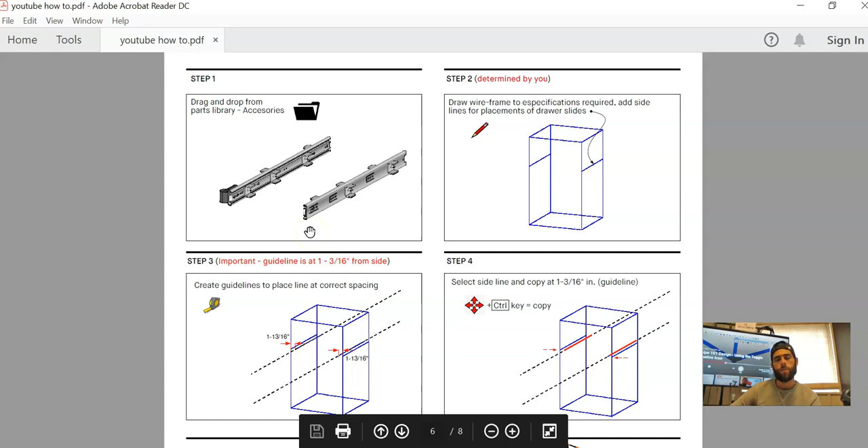Step one, we're just going to drag and drop the accessory. We'll find that in the parts library accessories file and look for the particular one that you're looking for. From there, we're going to draw the wireframe, and we're going to keep an eye out for 1 inch and 13/16. That is one of the most important dimensions for this particular type of drawing. And then we're going to make the interior wireframe, which is going to represent the actual pipe frame.

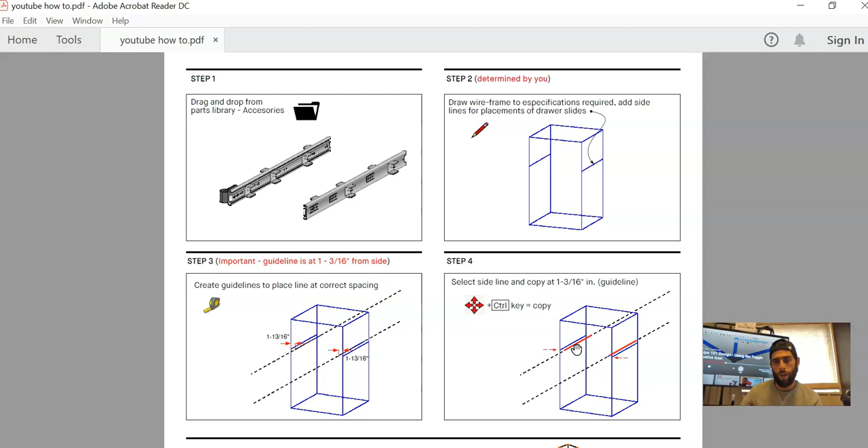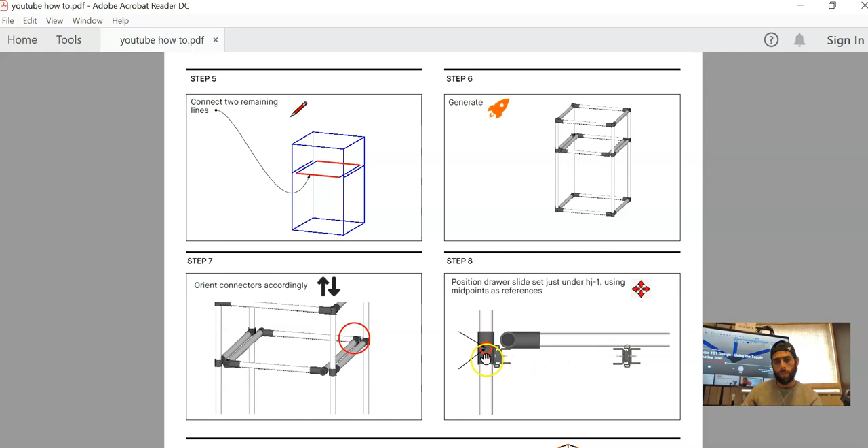Okay, step 5. From there we're going to finish closing it off. We're going to generate the structure. We're going to look for any changes that we may need to do to the connectors. And then from there, it's all about using reference points and the move icon to position the drawer next to the actual HJ1 where it's going to be sitting.

The reason for that is so that we can take a measurement to put it in the right placement on the opposite end. With the tape measure, we'll figure out what that dimension is. From there, we're going to select that, move it over, make sure it's in the right place, and then move it up to its final destination.

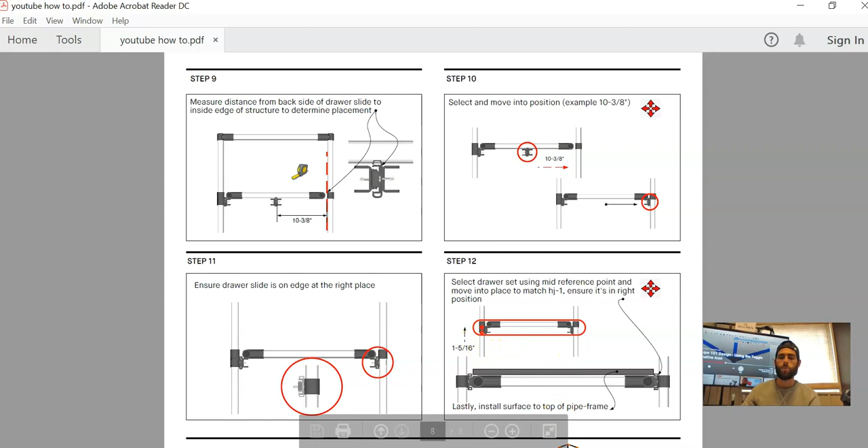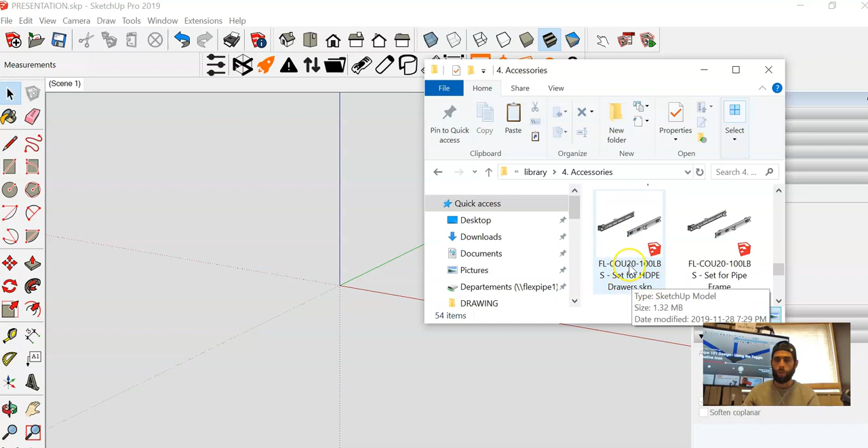All right, so let's jump into the drawing. First thing, what did we say? We need to open up that parts library and look for the accessories, and then look for the actual drawer slide set. Should be all the way at the bottom. And don't get it confused with the set for HDPE drawers. We want to look for the one that says set for pipe frame, okay?

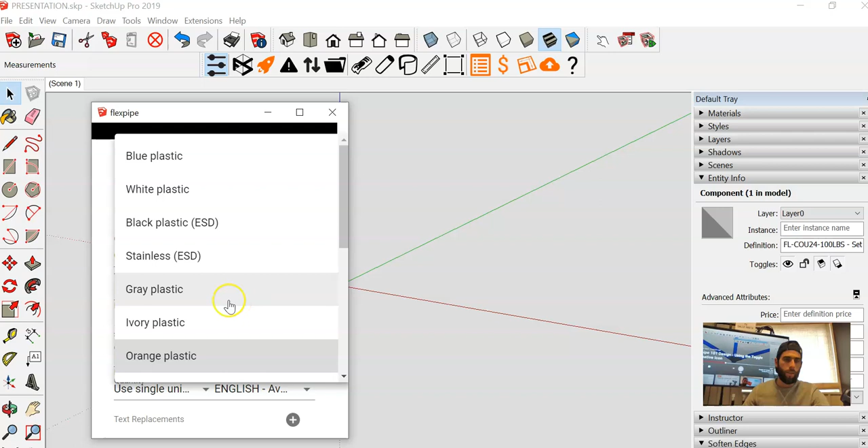And I'm looking for the 24-inch 100-pound weight cap. So this is the guy right here. We're going to drop him in there. And now we're going to draw our structure. We can choose black connectors, and then what do we want to do today? Maybe red. Let's go for red.

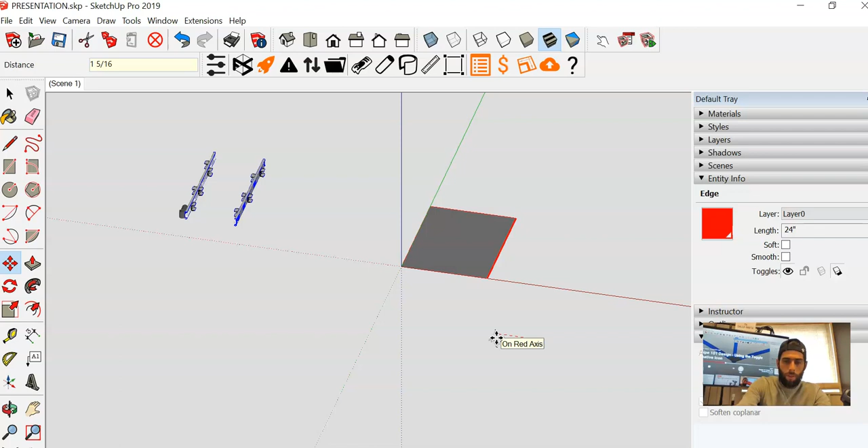All right. So with that, we're going to draw 24, 24. Okay. I'm going to reduce this 1 inch and 5/16 because I want it to be 24 exterior dimensions when it's all said and done. So that's why I want to move this 1 inch and 5/16 on both sides, so that it's actually 22 11/16 center to center. And then when it's generated, it's going to be 24 exterior dimensions.

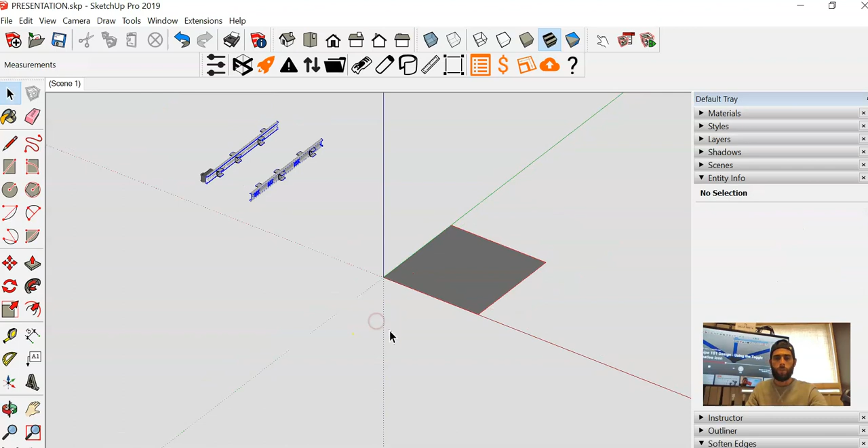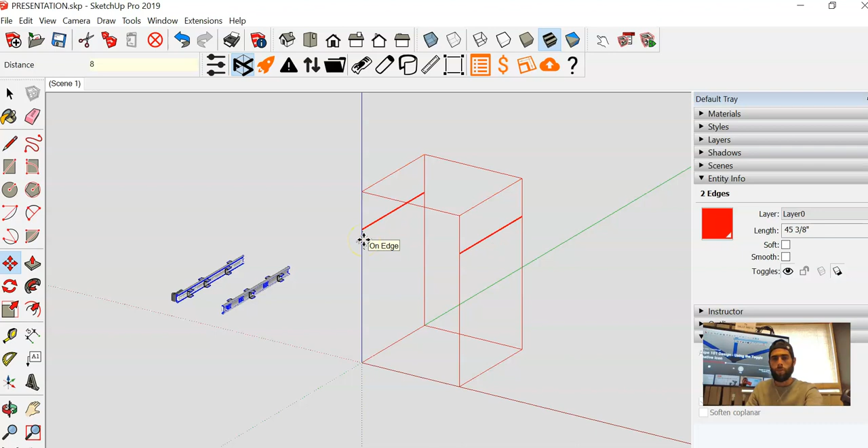Last thing, I'm just going to bring it up so we have enough height to do the operation here. Okay. Next thing is let's make a copy. We want to grab the sides, and we're going to bring them down to, let's say, 8 inches, and that is where the drawers are going to sit on the actual structure.

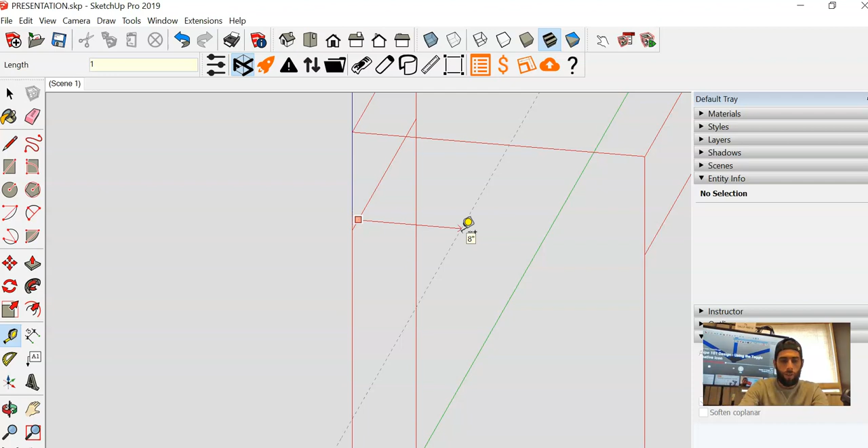We now need to draw the actual pipe frame for the drawer. So 1 inch and 13/16 is what we mentioned, so we want to create a guideline coming away from the first line, 1 inch and 13/16. And then I'm going to do the same thing on the opposite end as well, 1 inch and 13/16.

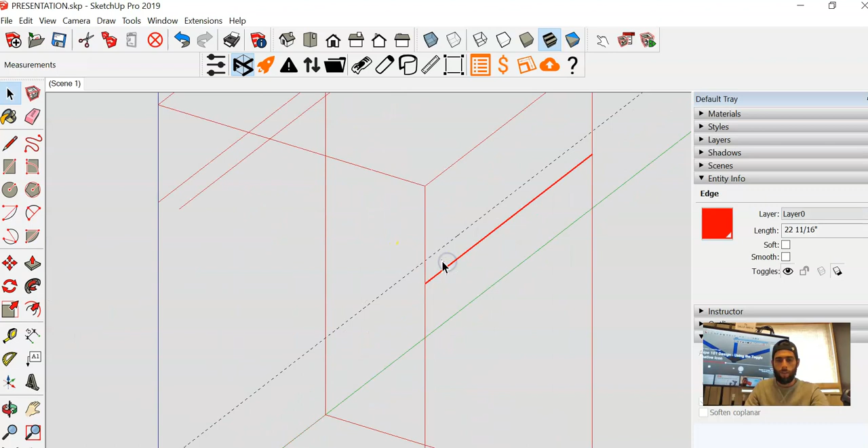So with my guidelines in place, I'm going to make a copy of this and bring him over so that it ends up on the line. And then I'm going to X that, and same thing over here, okay? So we can make a guideline, or you can make a copy and tell it to go 1 inch and 13/16. Whichever you're more comfortable with. The idea is to make sure that it does get to be at 1 inch and 13/16. So not too bad there.

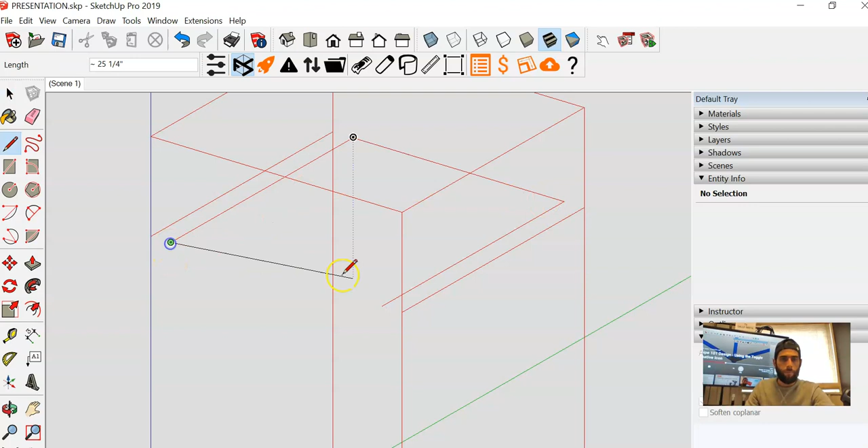Next thing we want to do is connect those remaining 2 lines there. Okay, there we go. So nothing to it, right? Other than that, we're just going to go ahead and generate this.

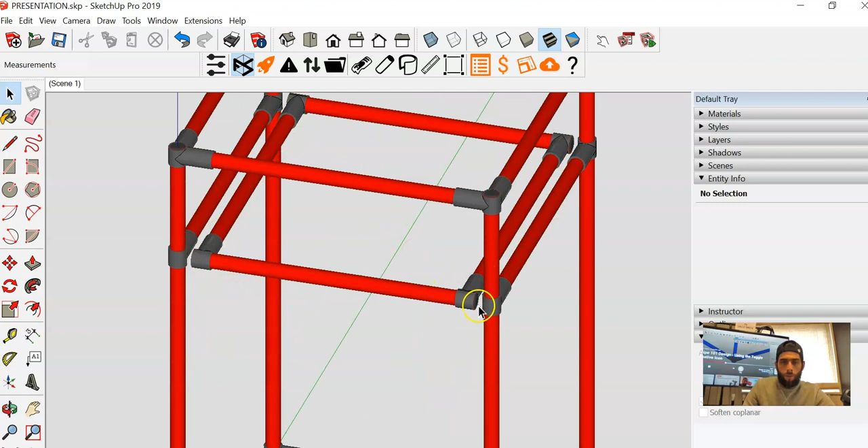And now we're going to go and find the toggle alternative, because what we want to do is just to see if we have to change anything, any orientation of the joints. So right now they are all lining up how I would like them to be. If for some reason this one ended up being in a different position, like so, then it's just a matter of, again, looking for the right positioning and lining it up so it matches the rest of your HJ1 connectors, okay?

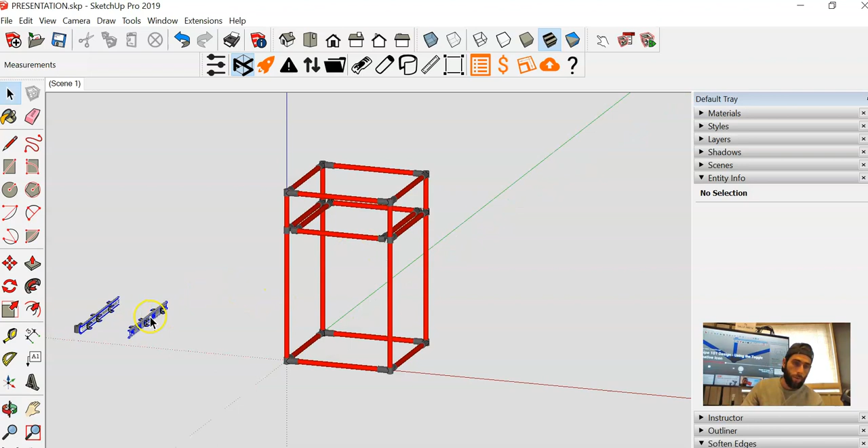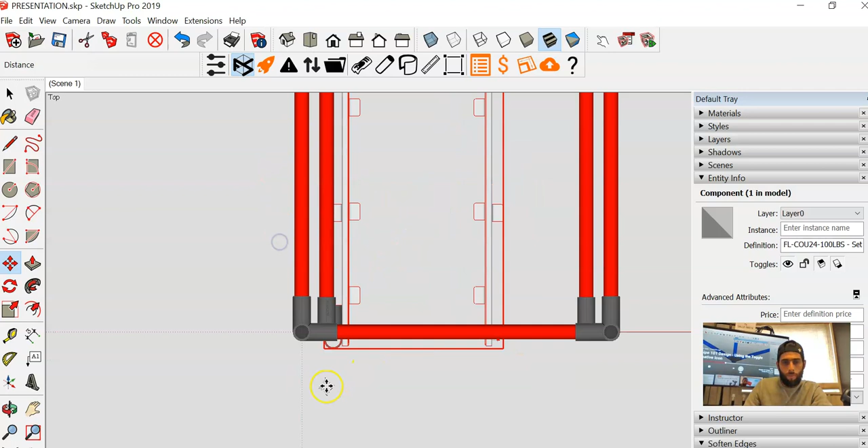So at this point, what do we need to do? We need to go ahead and now select our drawer slide set. And with my move icon, I'm going to go ahead and move this as close as I can to be able to find that reference point. So maybe I can look at it from the top to see if I'm actually, okay, yeah, you see? So now I need to go ahead and bring this guy forward so that I can get him close enough to where I'm going to be able to do what I want to do, which is connect the top midpoint with the bottom midpoint of this other one here.

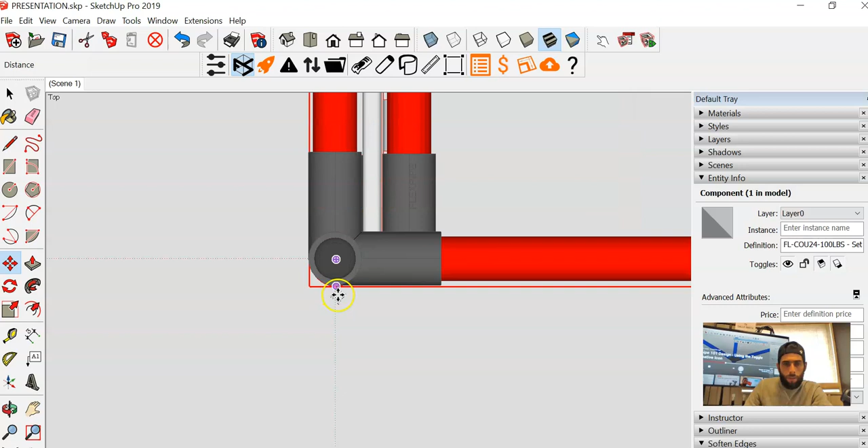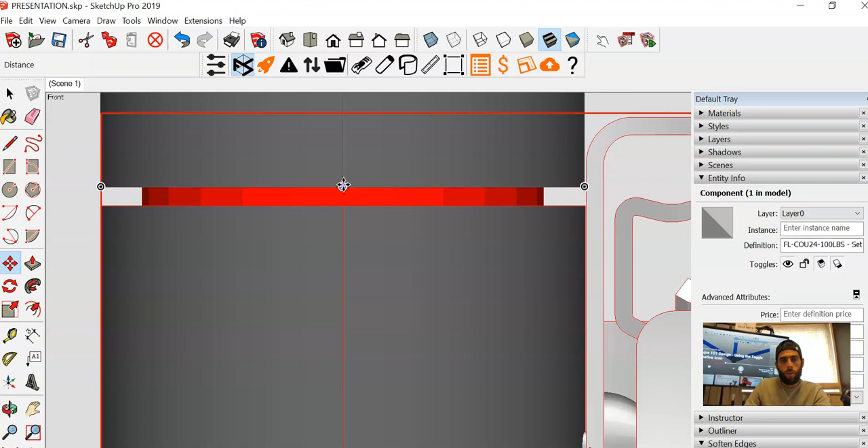So I can't seem to be able to do it. Maybe I need to go ahead and top view, and it's maybe just a little bit off. So I'm just going to bring them down, and I'm just working in straight lines so that it's a little bit easier for me to do so, okay? And I should be pretty good there. So maybe if I just hover over that one reference point where I want to go, and then I go back to the one I want to move, sometimes that actually helps put it into place.

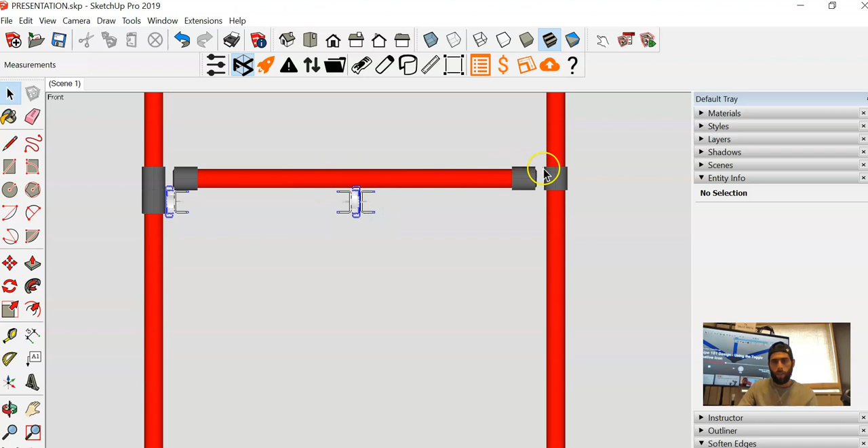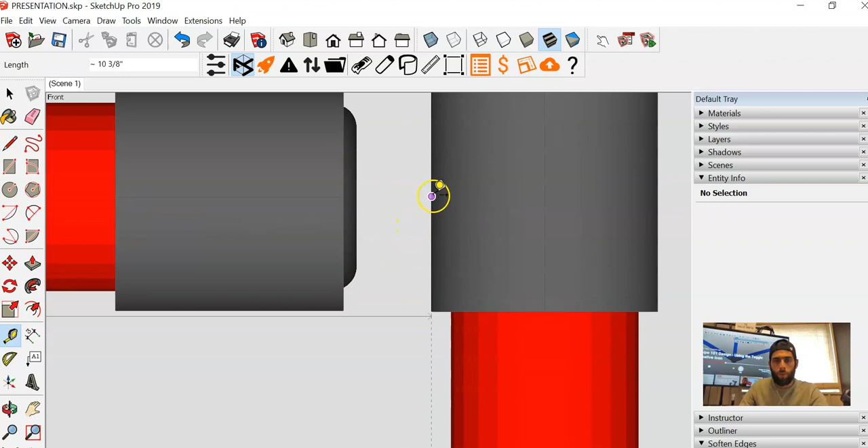All right? Now, we are good in this spacing here, right? We can see that we have the right space. Now what we want to do is figure out how far to move this fellow here so that we can get him on the right placement here. So that's why I haven't fully placed it in the final placement here. I just want to look at it from here so I can actually use my tape measure and get a nice clear dimension of that. So I'm going to go from the edge, right, from the back side, and I'm going to bring him to 10 3/8 of an inch. So that is where I need to go.

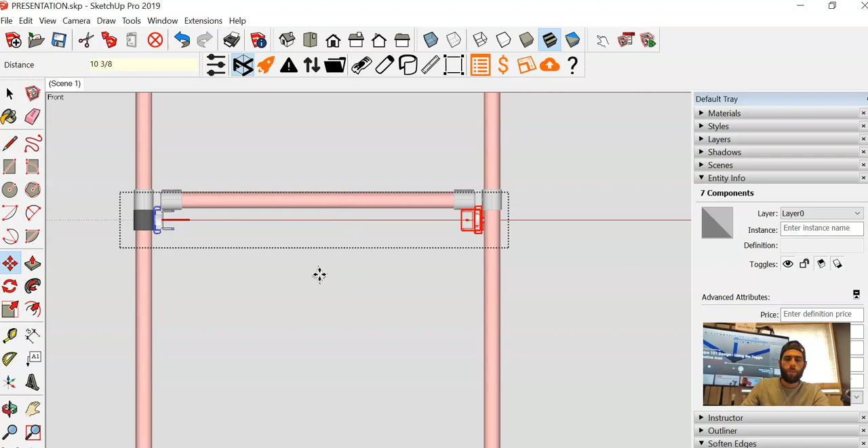So by doing so now, I can go ahead and select my group, double click to get inside of that group, and then just make sure to select the particular pieces that I would like and go ahead and give it the dimension. So we're going to move it, what do we say, 10 3/8 of an inch, enter, and voila. Okay, so good, we're right on the edge, we can see there, and now the final thing that we're going to do is to select it and bring him over. So maybe we can use the bottom midpoint here, and I just want to line them up to the actual placement there, right?

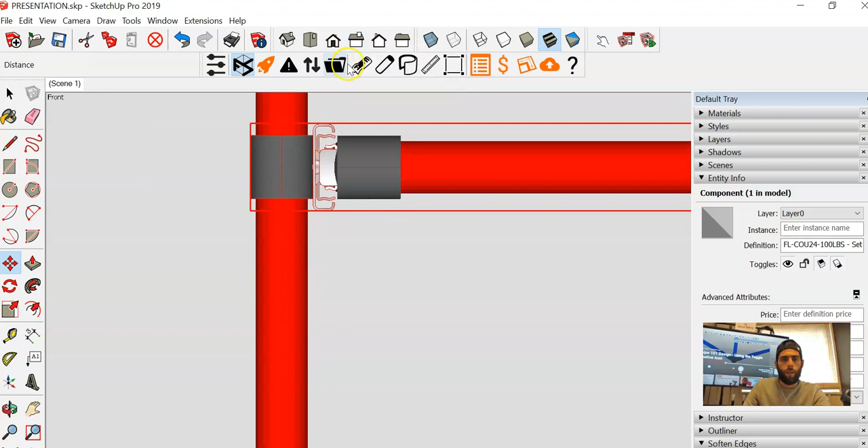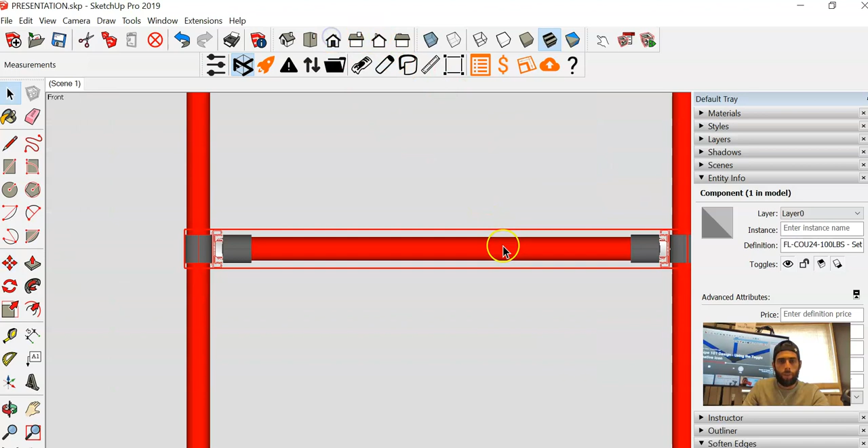Maybe I can look at it from the side. Something's not working for me here. Maybe I'm just a little bit off. So let me check from this side and see where it is that it's just not lining up. Okay, so this is my actual drawer slide set. And very quickly, before we put it into place, what I want to say is that this drawer slide set has an HJ1 dummy. So this one here has no attributes. It's just to help us place the actual drawer slide set. Okay, so we're using that just to find reference points here.

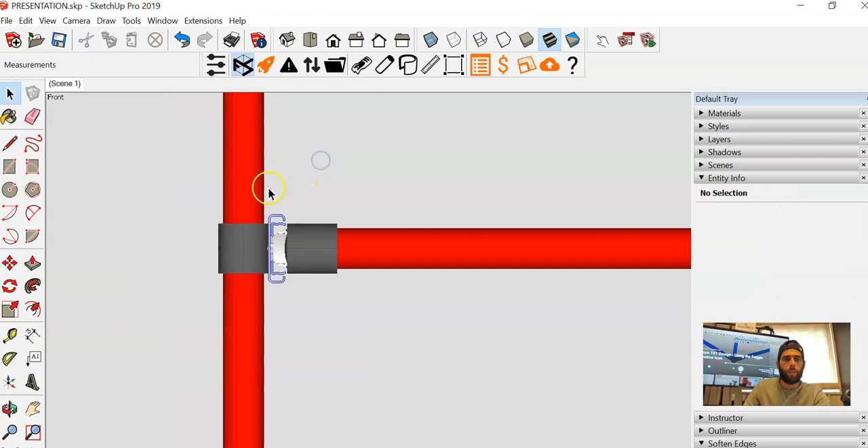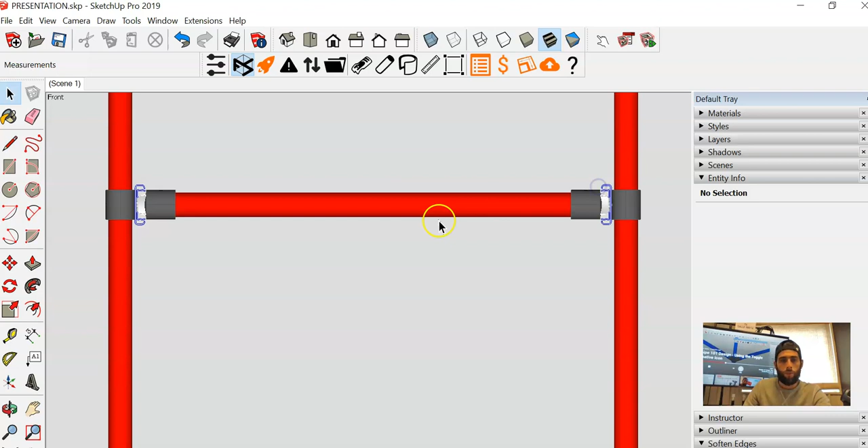There we go. So we are on the end point there. Now we are in place. Okay, so if we look, we orbit, we can see that we are in the right place. And other than that, the only thing that you would need to do now to this scenario would be to go ahead and maybe add a surface and install it to the actual pipe frame. Okay, so this is a different kind of setup. We have many different models, many different designs that you can look at flexpipeinc.com that can show you what kind of structures we use this particular setup for.